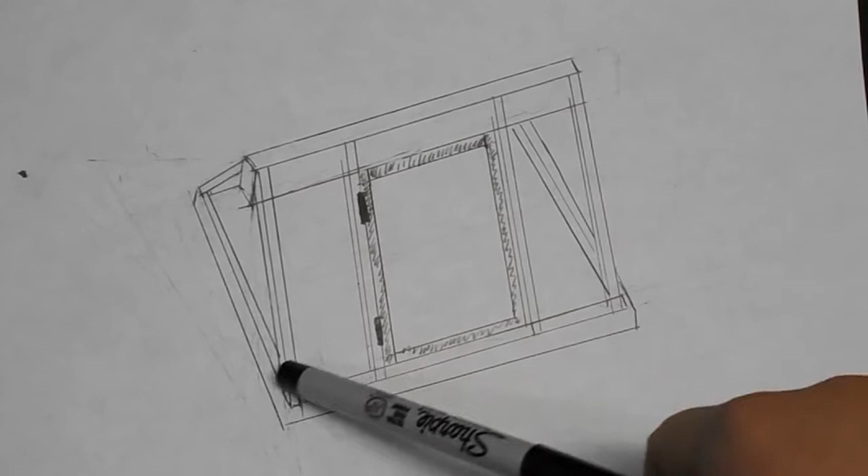Just a little breather. So what we need first to build the greenhouse is a set of blueprints. This is my rough idea for the greenhouse right here. As you can see, it has a triangular shape with a ridge right here, with 4 rafters on each side, 4 in the front and 4 in the back. We have our base right here that will contain the plants, and we also have a door that we will make right here. So that's the rough idea.

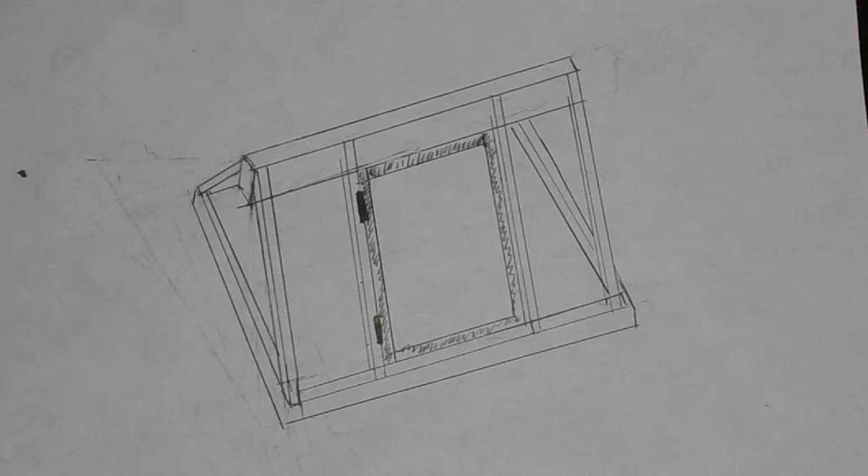A little bit later, I came up with the more detailed plans. The first part is the base frame right here. The length is going to be 32 inches long, and the total width is going to be 18 1/4 inches. The wood for the length is going to be the same as 32, but the inside wood right here is going to be sandwiched between the 2 pieces of wood, so we need to make it smaller than 18 1/4 inches. So it's going to be 15 inches for our width board.

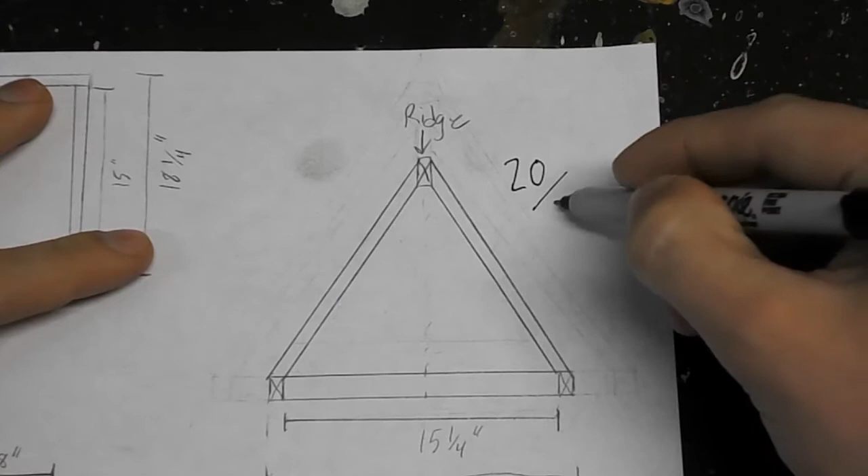Now what you can see is the side view of our triangular shape. This is the width right here, 15 1/4 inches across. And you can see we have our ridge board right there, and here are our rafters. Our rafters are going to have a pitch measurement of 20/12, meaning for every 12 inches it goes across, the height will increase by 20 inches.

That's going to be pretty steep, but considering its small size, it won't matter anyway. Plus, since it snows during the wintertime here in Utah, we need to make a steeper roof so that the snow can easily brush off.

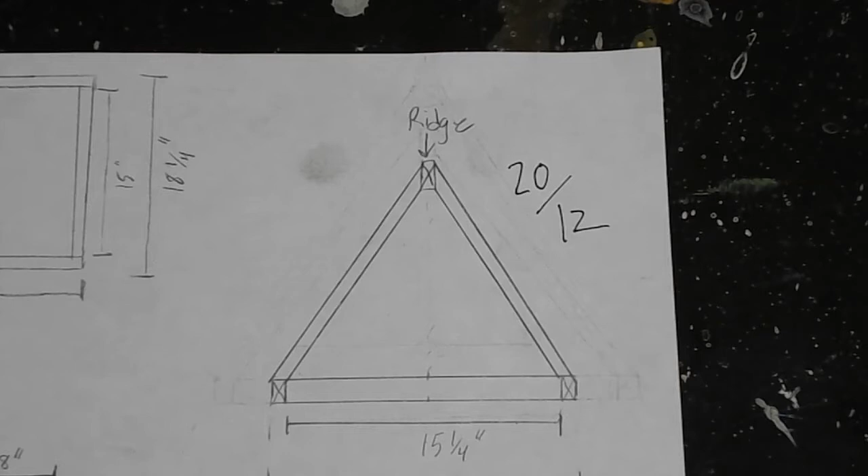Here's the front view of our greenhouse. As you can see, we'll have 4 rafters on each side. Our base will be right here, 32 inches long. And I forgot to mention that our rafter length will be 16½ inches long if we do the 20/12 pitch measurement.

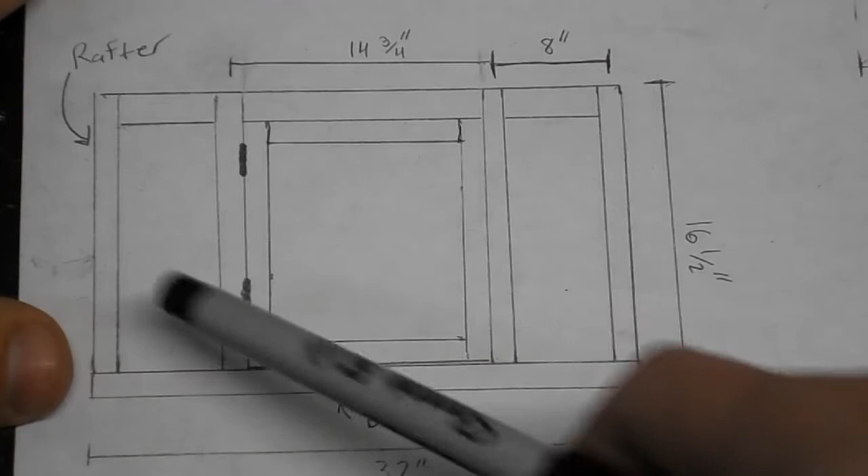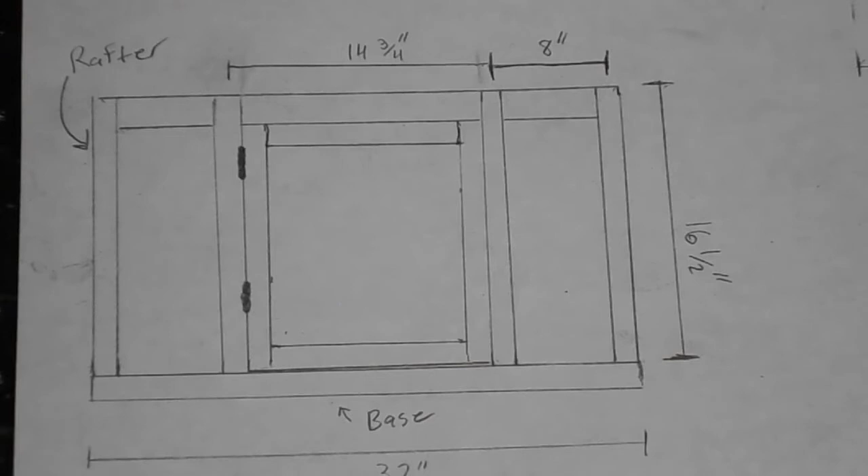Between these two rafters and these two rafters, it's going to be 8 inches apart from center to center. Now, since we're going to put a door here, I think 8 inches is a bit too small to fit plant pots. So I figured 14 3/4 inches will be good enough, long enough so that we can put our plant pots in there. So those are the basic dimensions of what we need to make our greenhouse.

Oh, and I forgot to mention that the ridge board will be the same length as our baseboard, 32 inches. So my narrator will take it from here. All right, off you go.

Well, thank you, John. You're going to need a 2x4 piece of wood that's 8 foot long. You're also going to need a 2x2 piece of wood that's about 4 feet long, a drill, your skill saw, and 2.5-inch pieces of screws.

And of course we've got to have Mr. Speed Square right here, as well as a hammer, and last but not least, a staple gun. You'll also need some nails with a plastic top, which I'll explain later.

Alright, so as you can see, these plants here are mine, well technically my mother's, and she wants me to make something to protect them during the wintertime. So that's when I thought, well, I'll just make myself a greenhouse. As you can see, it's getting to be fall time, and I need to make this pretty quickly in order to not be caught off by winter, if you know what I mean.

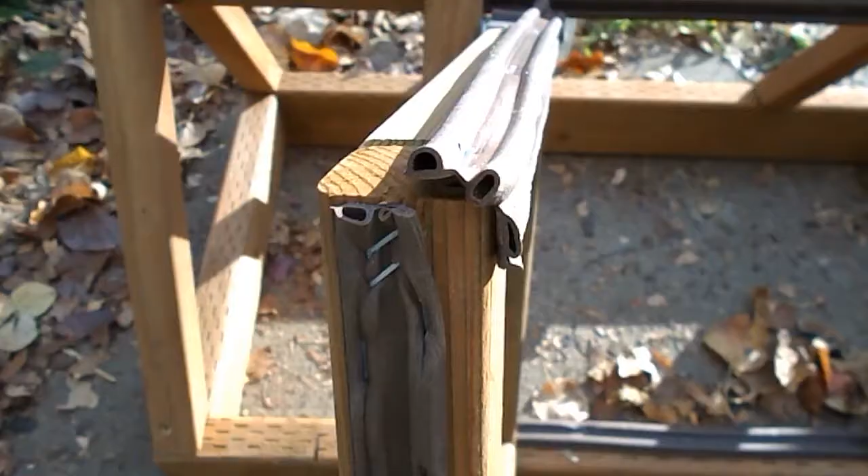Now you may be wondering, there's a gap right there—how would you protect your plants? Let me show you. You take a plastic door strip with adhesive on the bottom, cut it to the length needed, and put it on the wood with the adhesive. Then take a staple gun and staple the plastic door jamb all the way around the door, as much as possible, so there's no chance of cold air coming in.

Ta-da! Oh, okay. I think I'll let myself talk to you for this little part.

Now we need to get the plastic on. I recommend using this type of plastic: 6 mil extra heavy-duty clear plastic sheeting. This will ensure it endures during the winter season, while still being clear enough so light can go through the greenhouse and reach the plants.

Well, thank you, John, for that little interruption. Gosh, so rude. Well anyway, what I was trying to say is you use this plastic to cover up your greenhouse now.

Just like a Christmas present, go ahead and cut the plastic like so. Keep in mind that the edge of the plastic must go over a rafter, not over a place with no rafter, because the rafter provides a means to securely fasten the plastic down onto the greenhouse and keep cold air from coming through the cracks. After making sure it's over a rafter, use the staple gun to temporarily staple the plastic onto the greenhouse. This isn't an effective way to keep the plastic from coming off by itself, but we use plastic top nails to securely fasten it down. The reason is the surface area of the plastic top nails means wind won't tear off the plastic as easily as it would with just a staple. We do this all the way around the greenhouse—staple, nail, staple, nail, cut, nail—until finally we're done!

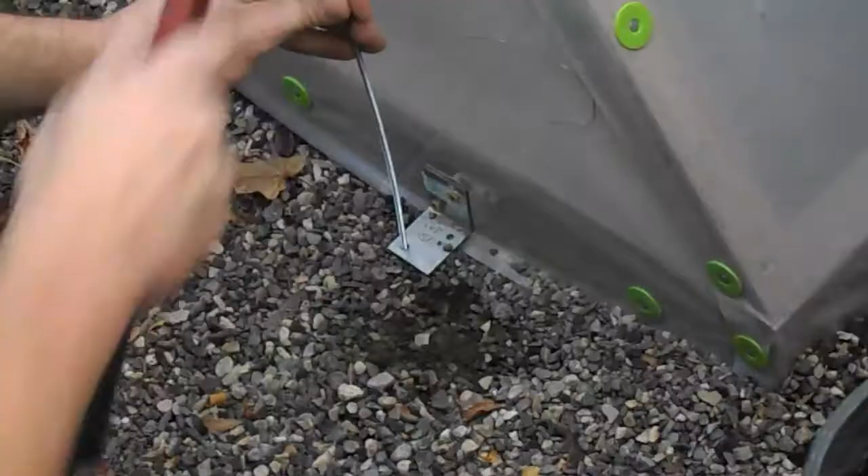Take these L-shaped metal pieces with nail holes in them and put them on the greenhouse. This lets us put a little stake through the holes and securely fasten it to the ground so there's no chance of wind blowing over the greenhouse. After getting it all staked down, we go ahead and put our plants in.

Oh, now they have a nice cozy home during the winter time. I'm just messing with you people.